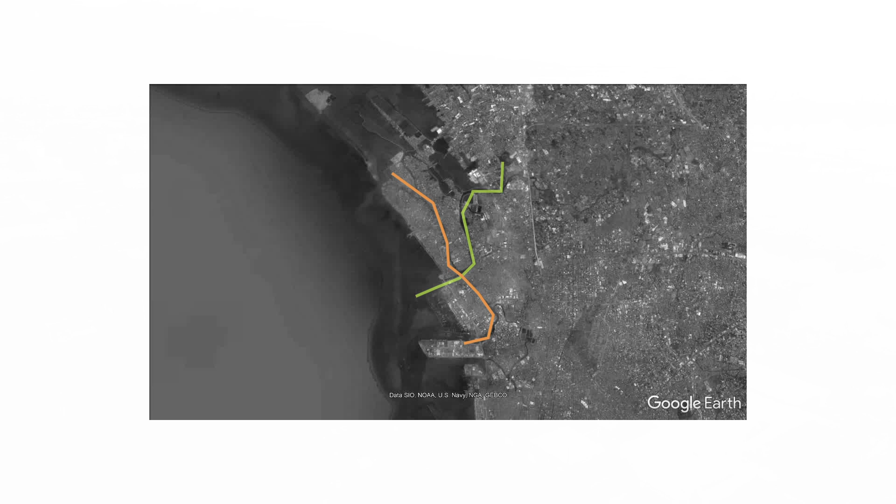Welcome to Navotas. It is along the coastline of Manila Bay, found in the northwesternmost city of Metro Manila. The reason why it's isolated from the rest is because it's divided by the Navotas River on the city's east and north front. Furthermore, the Tullahan River splits Navotas into two separate regions, creating a coastal city.

Life before Navotas was simpler, being surrounded by bodies of water made it teeming with fish, thus attracting fishermen. But of course, with the unstoppable force of urbanization, other livelihoods have popped up in the past decades. The city still remains the top supplier of the metropolis's fish needs.

You may think that now there are plenty more fishing ports in the area, but that is not the case. Factories are getting more abundant, especially in the North Bay region, and houses are multiplying in an unhealthy state. Informal settlers are spilling out of the edges of the riverside, people are residing on cemeteries, houses are cramped creating potential fire casualties. Housing may be a problem, but the nail on the coffin when traveling around Navotas is a pain.

This is Manang Jocelyn. Right now, she's delivering a bucket of chicken to somewhere in Malabon City. Her story is that she was a housewife for her two twin children and her husband.

During the pandemic, the family started using their savings, so they needed to find other alternatives to earn back the money. Luckily, her husband's work was flexible, but the pay was cut in half. Thus, Manang Jocelyn would volunteer to help out too.

Luckily, they had a family bike that was not in use. Manang Jocelyn got the idea to be a courier delivery driver. She even heard from her family members that the income was better than average.

Manang Jocelyn's family lives in Navotas but close to the border of Malabon City. This makes her situated in both cities. She would bike alongside cars and trucks, and just solely that's already mentally taxing for her.

This does not faze her anymore. She wants to be with her family. Everything points back to the people and the things they go to great lengths to do to survive in this dog-eat-dog world. This shouldn't be the case for our fellow Navoteños. Here is ReStitching Navotas.

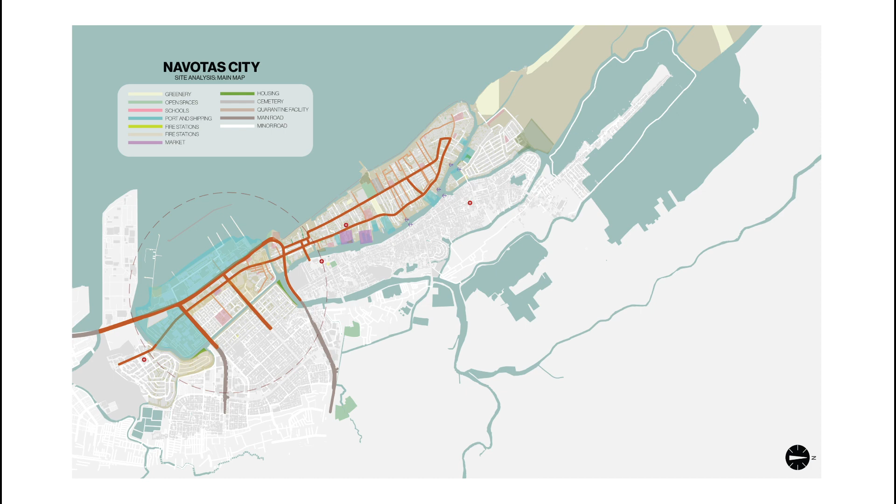We chose the North Bay Boulevard and Bangculasi area as our site. Our task was to reconfigure and improve the connections and intersections between the different types of roads found here.

The zoning map was obtained from the Navotas City Hall, set for the year 2016 to 2025. The industrial core is located at the south of the city with a few commercial zones, while the middle residential area is located at the center of the city, combining residential, commercial, and industrial uses along the river.

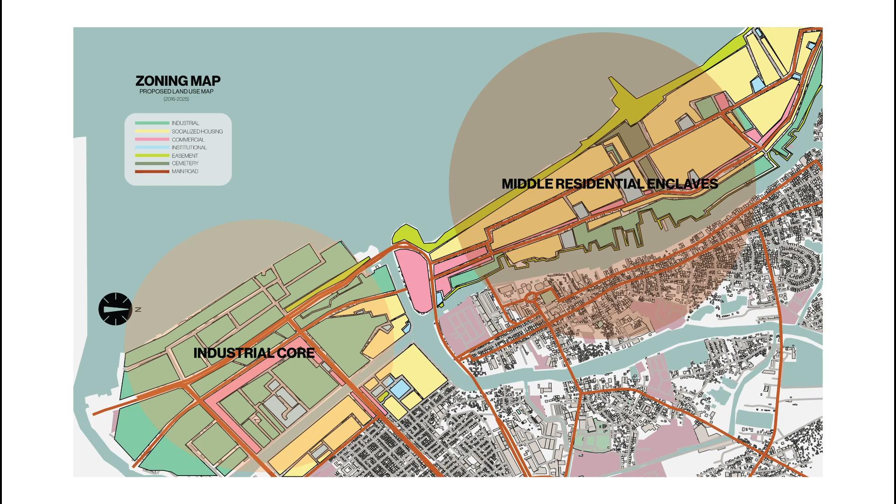The Navotas streets and alleyways are disproportionate to what they were intended to be. For example, in residential areas, sidewalks are either too narrow or barricaded with posts, vehicles, or benches. And some highways are so wide that at certain times of the day they look barren.

To help us execute and approach the project systematically, we created a profile of networks to categorize the different road types currently existing in the city. Based on our observation and research, we identified 5 types of profiles.

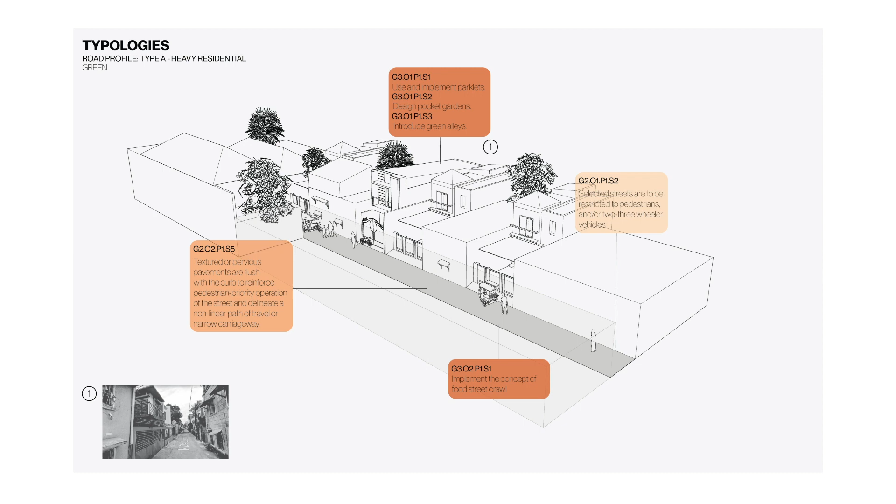Type A is heavy residential roads. Under this category, we have 4 road types labeled green, red, yellow, and blue. Green is purely residential, used for small transportation, pedestrians, and alleyways, and has no sidewalks.

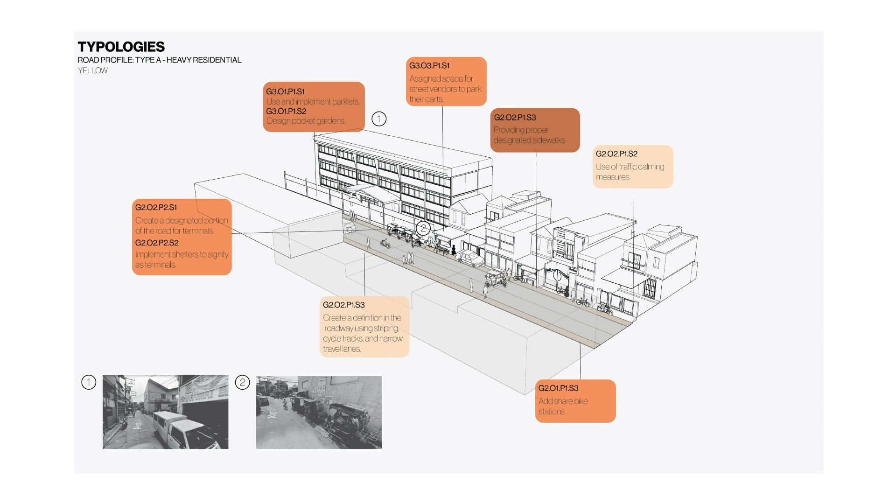Red is heavy on residential areas with local areas such as schools, churches, and commercial spaces. No industrial areas are located here; it has small transportation and pedestrians, and no sidewalks. Yellow is heavy on residential and local areas, no industrial, small transportation, pedestrians, and has sidewalks.

Blue is heavy on residential. There are barely any sidewalks here, and it is along a body of water.

Type B is heavy on residential with medium-heavy commercial use. Under this category, we only have one road type, labeled cyan. Cyan is heavy on residential with medium commercial areas, small to medium transportation, pedestrians, and has sidewalks.

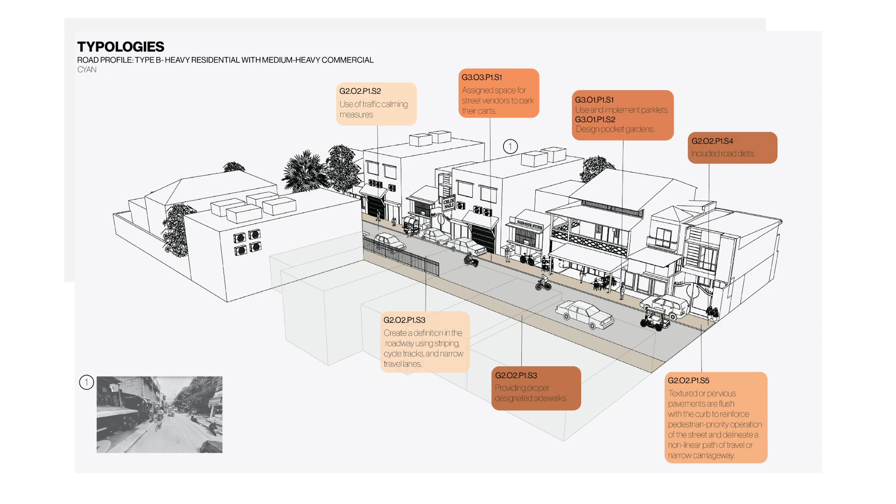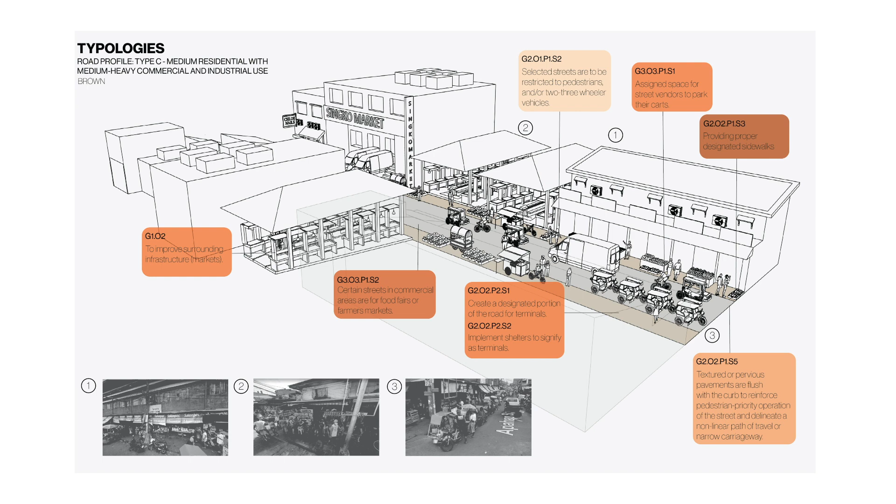Type C is medium residential with medium-heavy commercial and industrial use. Under this category, there are only 2 road types: brown and red. Brown is medium residential, medium on industrial areas, yet heavy on local areas, mostly with small to medium transportation and pedestrians seen on the street. It also has sidewalks. Red is similar to brown, although the road type is an alleyway and has no sidewalks.

Type D is heavy on industrial areas. Under this category, there are only 2 road types: magenta and purple. Magenta is light on residential, heavy on local areas, heavy on industrial areas, and accommodates heavy transportation such as wheeler trucks and fast-moving vehicles.

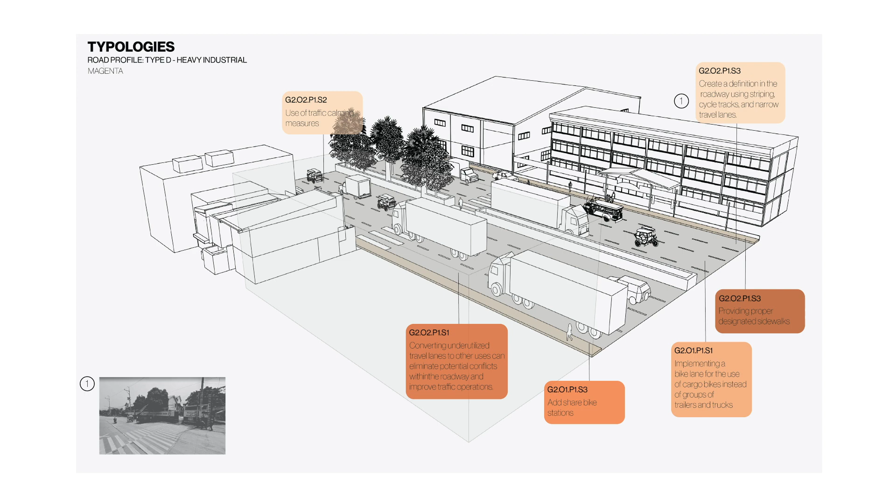And then we have magenta. Magenta is purely industrial areas, heavy on transportation, with wide highways and wide sidewalks. The last type is Type E, which are rivers. Rivers in Navotas are Tangos River, Tullahan River, and Navotas River.

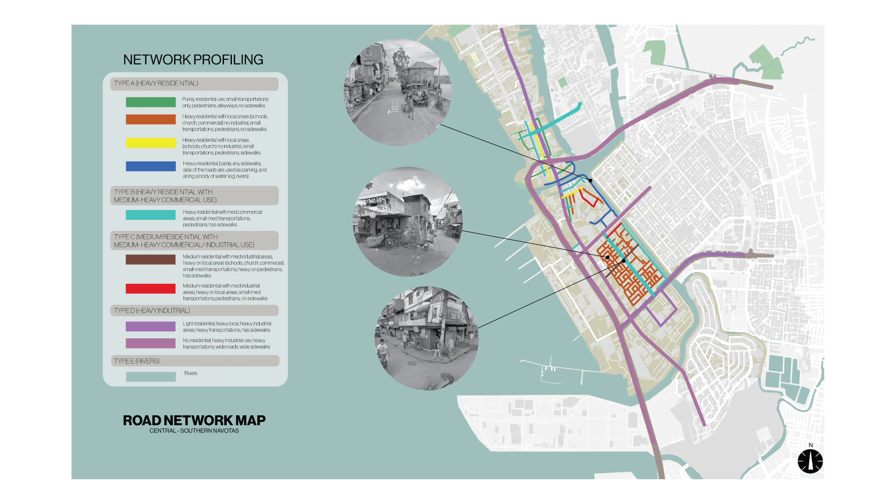Here is a map of how they interact and connect with each other. It can be observed that the magenta, or C4 road, cuts through the city coming from other industrial areas. With Navotas situated around bodies of water, it is inevitable to experience flooding. Narrower roads experience stronger floods, and that is exactly the situation with blue roads.

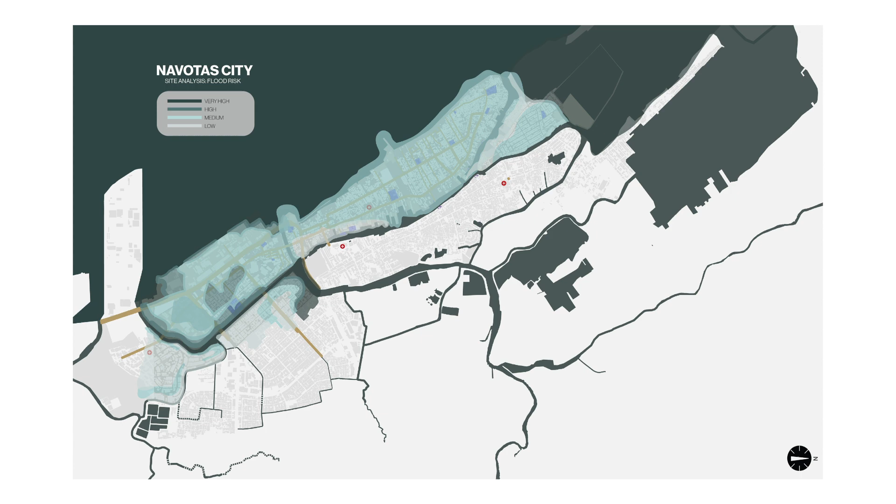It was determined that by 2030, the water around Navotas would rise nearly 11 centimeters, which will consume 28 kilometers from the coastal area. Our conceptual framework, entitled 'Achieving a Human-Centric Sustainable City Port,' divides the areas we wanted to improve into stages.

These stages are arranged based on what is more valued and needed by the people. They are also arranged by what will be prioritized in the project, with some added as supporting layers. Infrastructure and mobility will be the prioritized aspect, heavily focused on rehabilitating terminals and flood management systems, while commercial and welfare will be supporting layers for the first two.

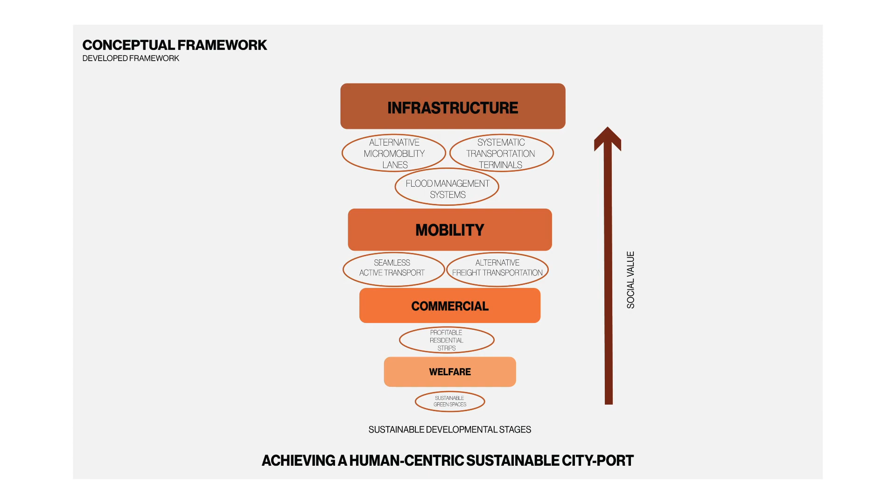We have 3 goals in our project. One is to aid the fishermen in the city. Second is to alleviate the dynamics of the residential-industrial areas. And lastly, to improve the welfare and city living for Navoteños.

Having cited our 3 goals, these are the objectives that could push our agenda further. Number 1, improve not just the roads but the surrounding utilities or infrastructures, specifically terminals, ports, and markets. Number 2, redesign common road networks to be balanced in terms of residential and industrial use. Number 3, make pedestrian commuting comfortable and safer.

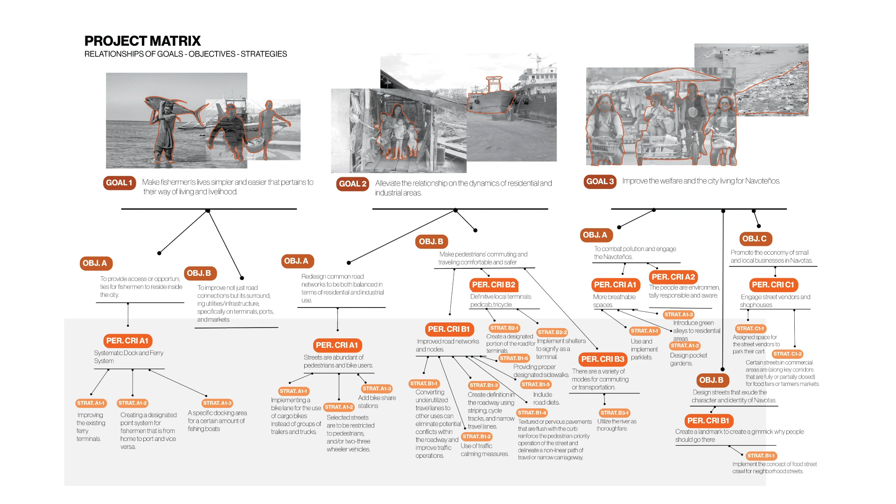Number 4, alleviate the flooding problem of the city. Number 5, combat pollution. Number 6, design streets that exude the character and identity of Navotas. And lastly, promote the economy of small and local businesses.

After thorough research and analyzing the situation of Navotas, we want to make sure the design is sustainable and not just a band-aid solution. Starting with the smallest type, which is type A, just a refresher, this is what we identified as purely residential area.

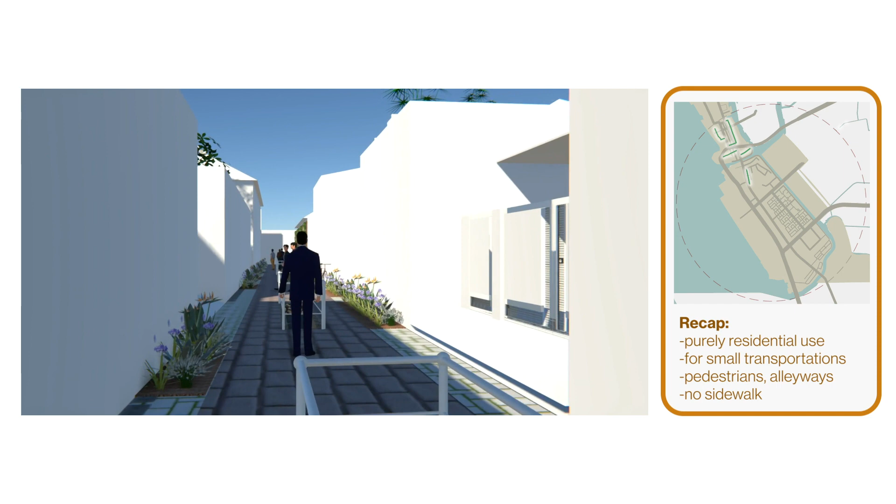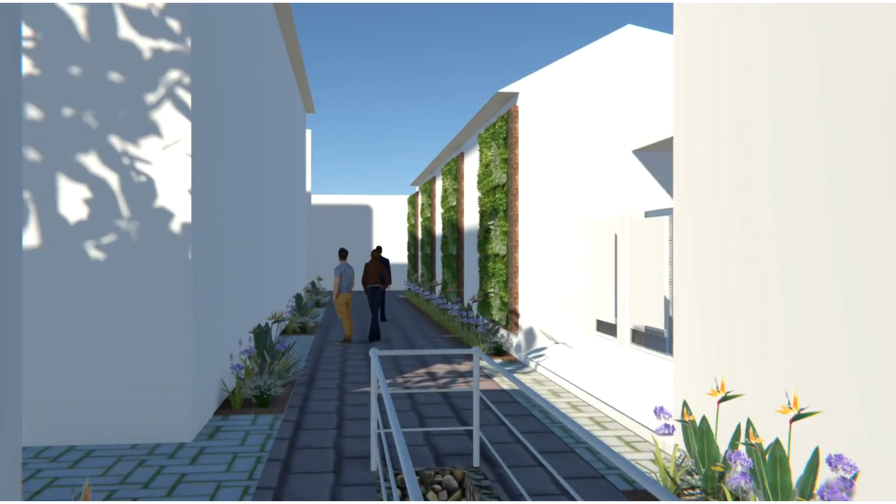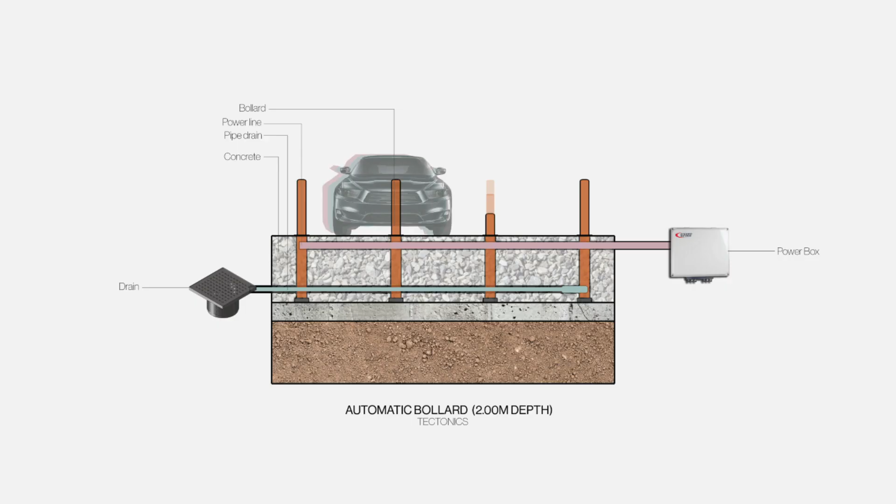However, it is still a residential area, so we cannot stop vehicle owners from entering these roads to access their home. We introduce automatic bollards to temporarily blockade the ingress and egress of the road unless the homeowner has a specific remote to turn it down and allow them to get in.

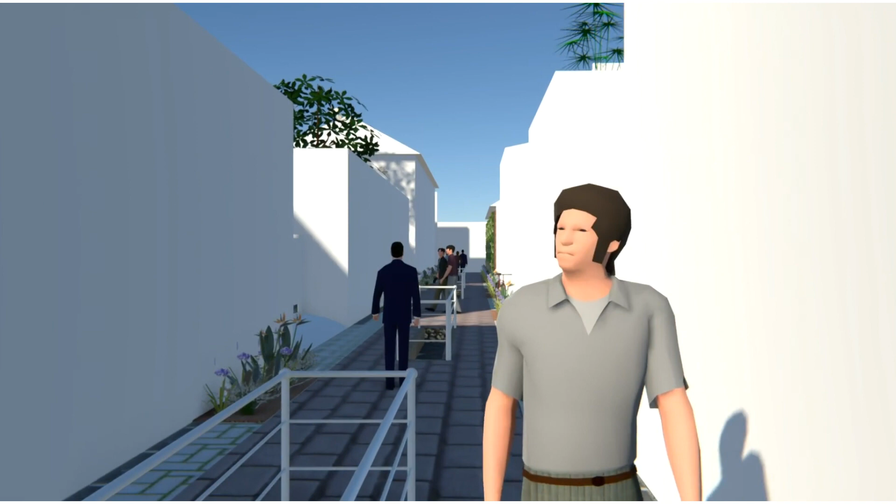Complementing the pedestrian streets is the application of textured or pervious pavements to further reinforce the pedestrian priority operation of the street, at the same time reducing flood levels by absorbing water on the surface. With the pervious pavement, we have green alleys to further push our flood management system.

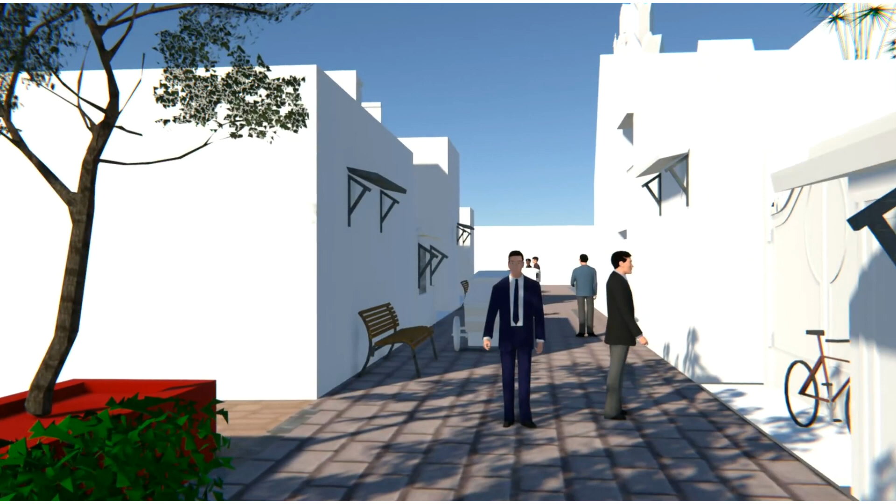Following green is orange. They have similar implementation of design, but there are some that still differ. Since orange is a mix of residential and local areas such as schools and churches, we introduced the concept of food street crawls. Navoteños can finally immerse themselves in the exquisite food that their city has to offer. At the same time, workers and drivers alike have adequate shelter while they are eating, and it increases sales and pushes local business and tourism.

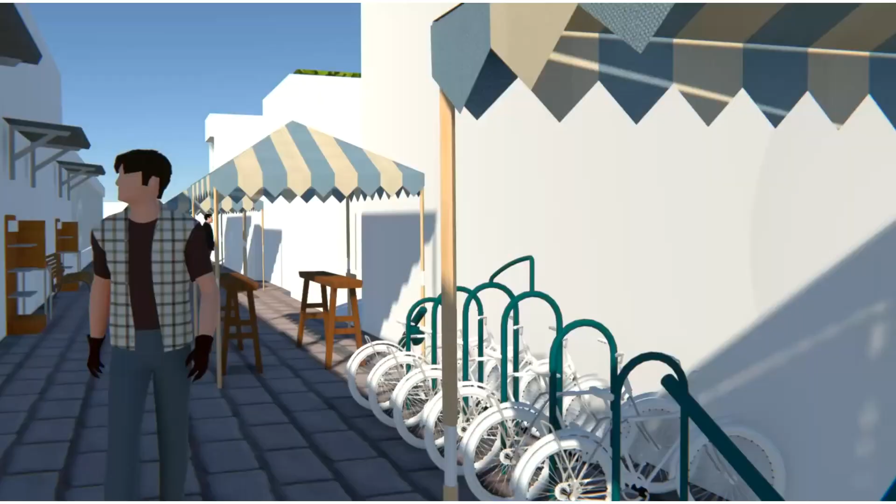It may look narrow, but we designed them in such a way that emergency vehicles are still able to drive safely through. And during Sundays, we can close down the road from cars and reuse the parking lot for additional space for food stalls.

Yellow roads are noticeably different from the purple types and the cyan and green. Yellow have more schools, churches, and commercial spaces. This makes the roads wider but not as wide as a highway.

With that said, their sidewalks lack width, therefore we had to merge the road and the sidewalk, creating a one-way street. This regulates the vehicle flow, freeing even more space for people and bicycles. To ensure speeds of cars are at the bare minimum, we added speed tables and chicanes.

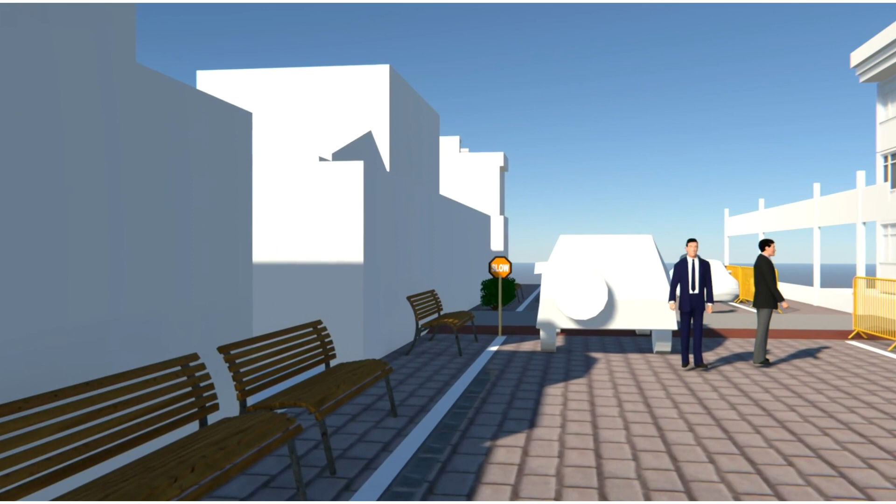There's a temporary tricycle terminal directly outside the school for the students who need a convenient access point to commute. For the flood management system, to name a few, these were implemented: rainwater gardens, infiltration garden, sloped camber road, water plaza, and green roofs.

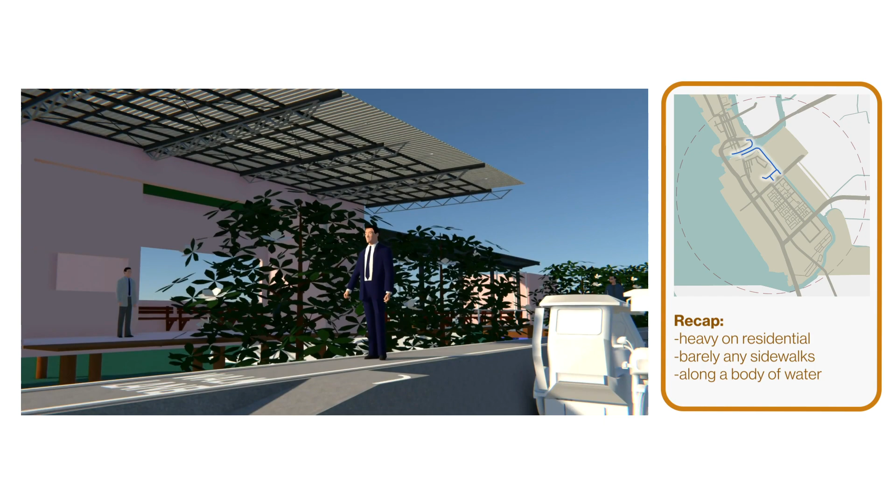We have discussed neighborhood streets that got flooded from rain, but what about roads that are directly affected by the river? These are what we call the blue. Sidewalks are too narrow, so we made cars and pedestrians share the same road. Because of that, to ensure the people's safety, we implemented traffic calming measures.

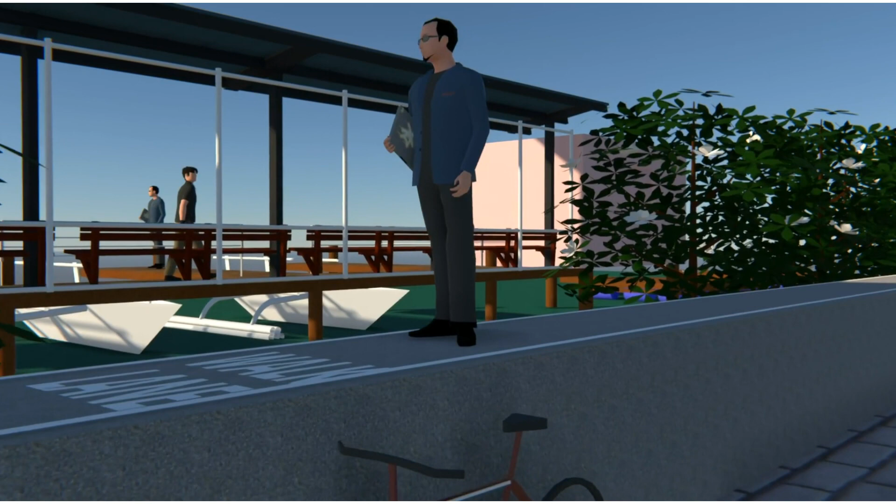We designed all of our ferry terminals to be open air and welcoming. The colorway was intended to be bright and stand out so commuters can easily identify them. It houses at most 15 people, since it's not a popular transportation route.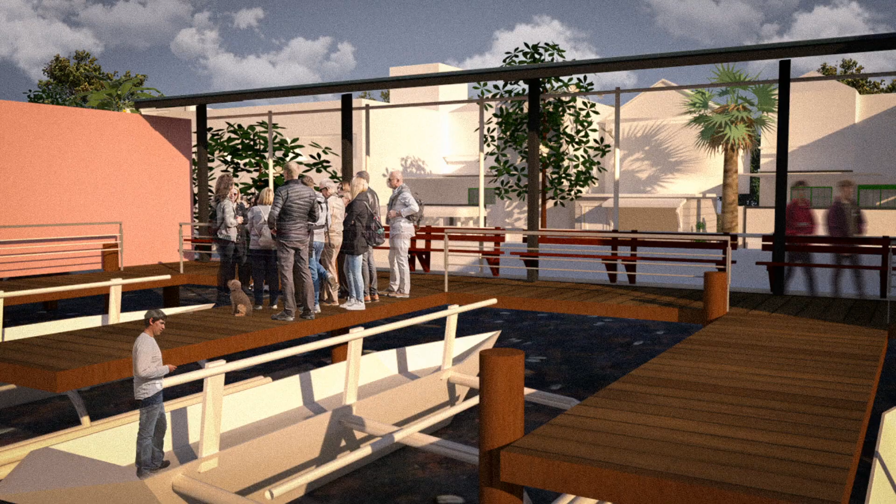Besides the passengers, it can also hold a maximum of 3 ferry boats and 4 fishing boats with proper boarding and docking areas. Right in front of the terminal is what we call a levee. They are made to prevent the overflow of a river. We also included a path for those who want to walk directly alongside the river.

The design for the cyan road type was to dedicate a designated two-way bike lane, since in the project we highly encouraged the implementation of cargo bikes to reduce the heavy transportation on neighborhood roads. Cyan is considered a major road since it is the artery to the alleyways.

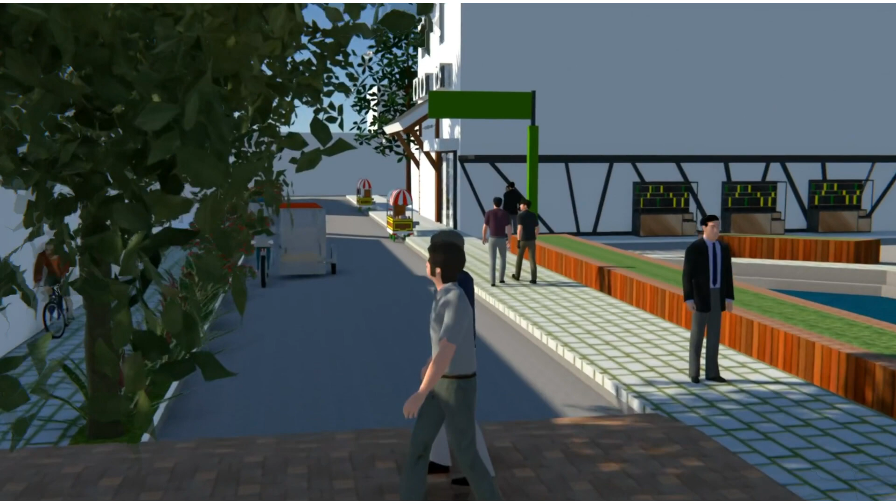Moreover, we wanted to make this road safer by implementing speed tables and vegetation barriers because there will be more pedestrians to accommodate for. As for our proposed approach for flooding strategies, we considered 3 levels.

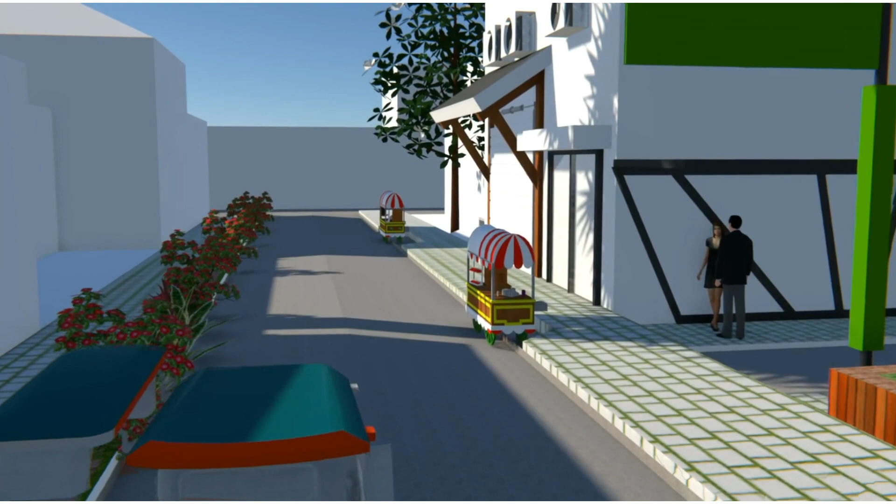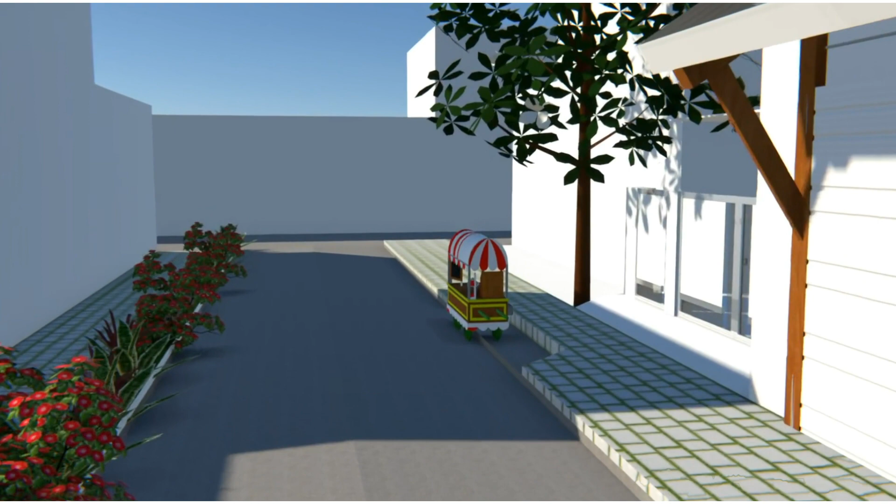For the medium-level flood risk, we opted for rainwater gardens and infiltration systems. For the high-level flood risk, there is the additional use of green roofs and water plaza. Lastly, the very high flood risk includes the use of slope camber roads, and an increased level for the sidewalks will be implemented.

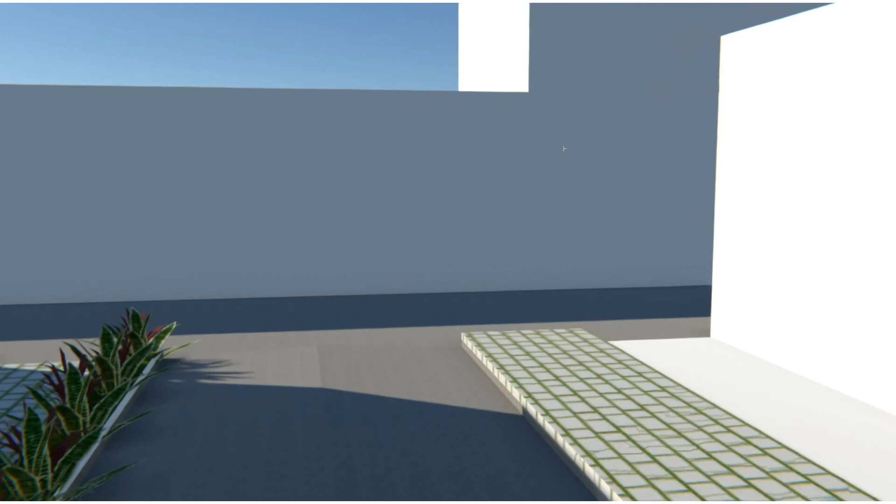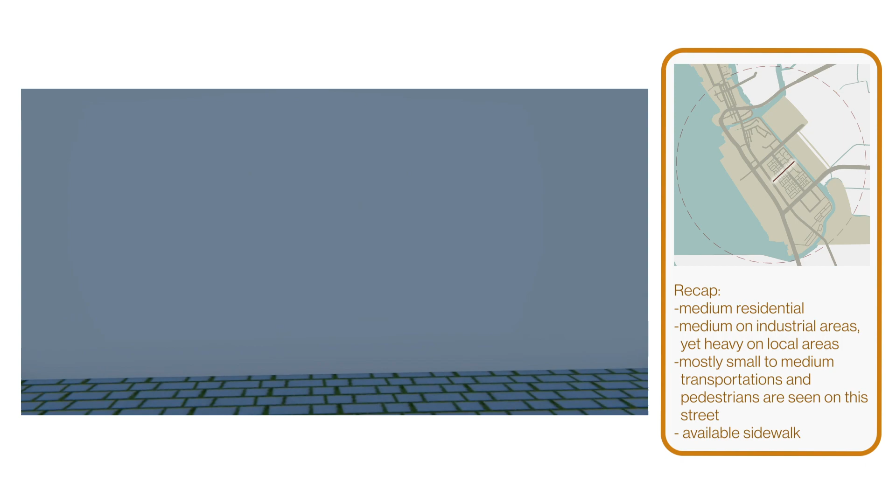The strategies that we applied for the brown road type include the following: providing proper sidewalks, dedicating the street for pedestrians, and improving its surrounding infrastructures, which are the market and the tricycle terminal. We also decided to make this street a one-way street since we dedicated one side of the road to be a walking street, since originally, the other side of the road was blocked by the terminal and the pedestrians.

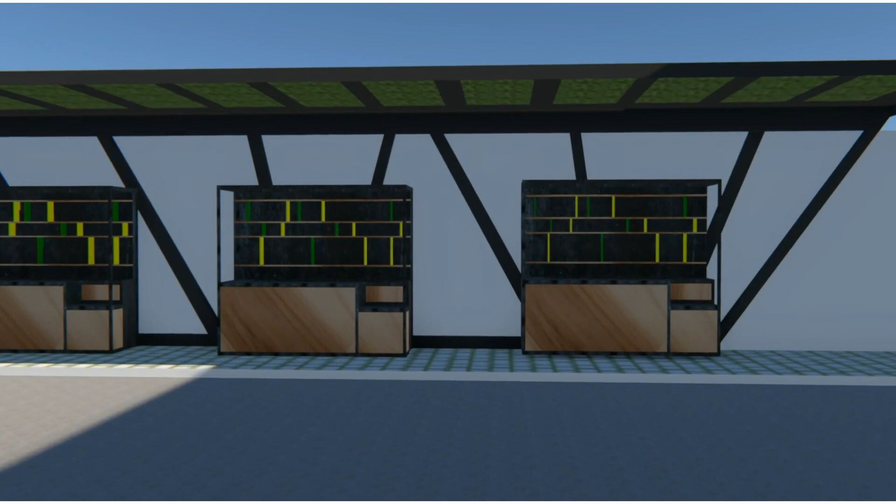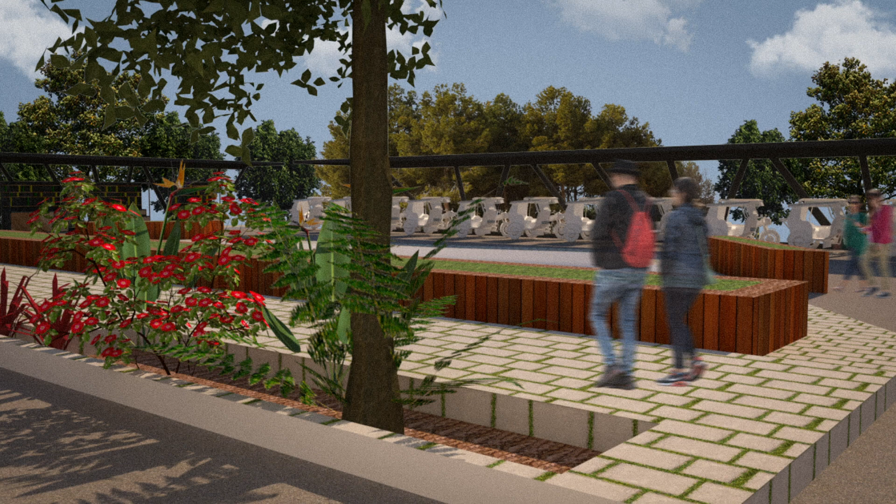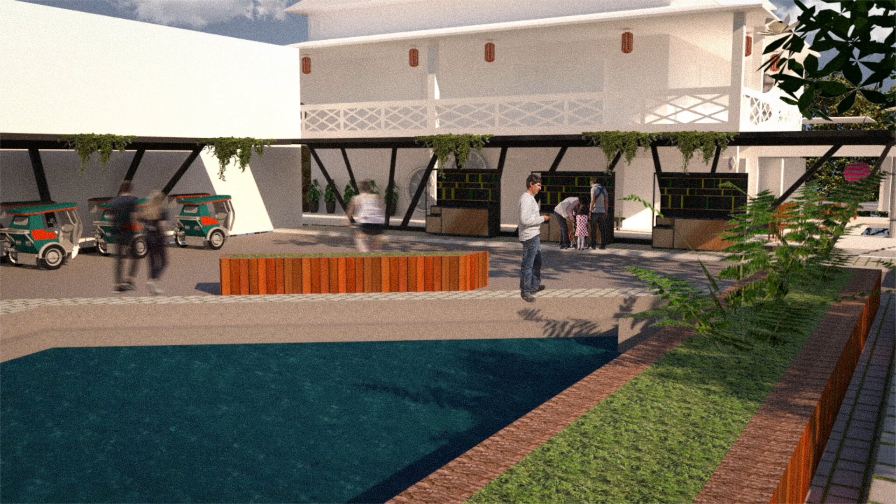As for our approach for alleviating the flooding, we propose two types of iterations in combating this at different levels. For the high-level flood risk, we propose the use of green roofs, climate roads, and infiltration. Meanwhile, the strategies for the very high-level flood risk are the additional implementation of water plazas, rainwater gardens, and using a slope camber on the road.

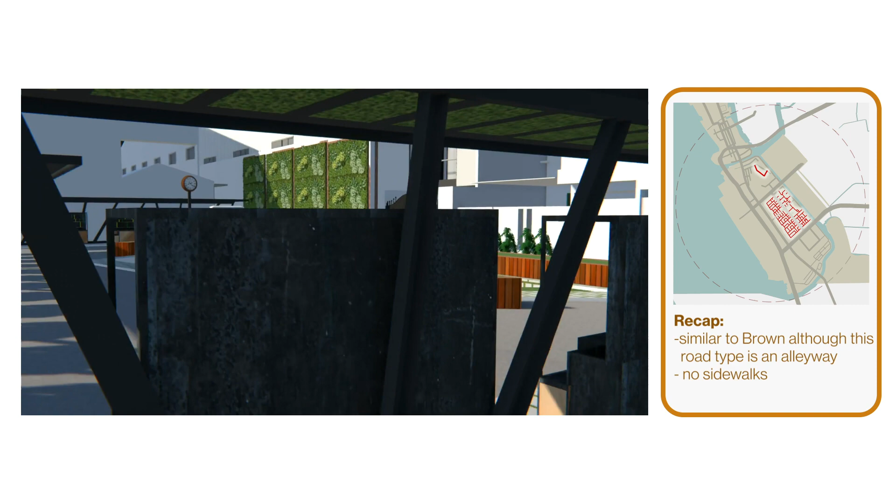Reyes Street is a very narrow alleyway that caters to residential and local areas. Given the limited space, we decided to remove the existing terminal on the road and designate a terminal instead. Additionally, a design iteration of a food street cart is also considered for this road type because we think that this could be one way to divert pedestrian traffic on the street.

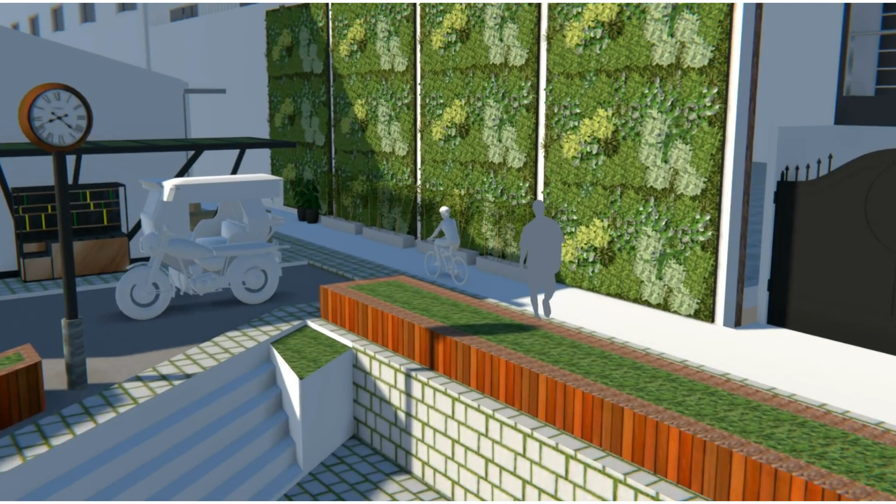As for our proposed flooding strategies, we consider 3 levels that include a variety of strategies, namely the use of rainwater gardens, infiltration, slope camber road, water plaza, green roofs, and green walls.

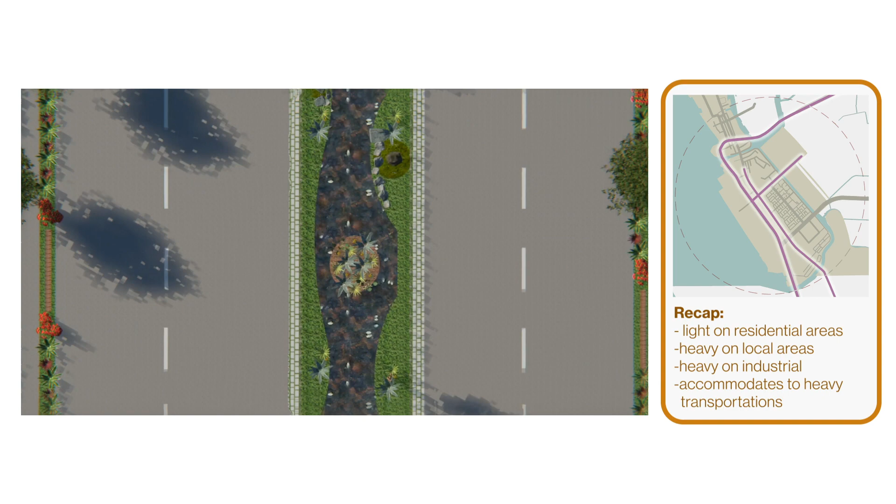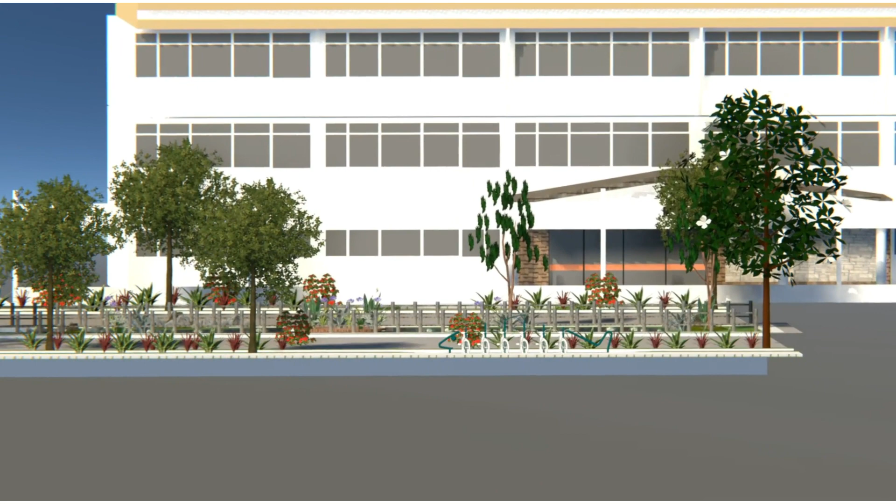Magenta is a highway road that accommodates residential, local, and industrial areas in Navotas. Currently, R10 Radial Road is an 8-lane road that only serves its purpose as a means for heavy transportation without regard for pedestrians. To make the road dynamic to residential and local areas, we use traffic calming measures such as road diets to lessen the lanes for vehicles and speed tables to reduce speeding.

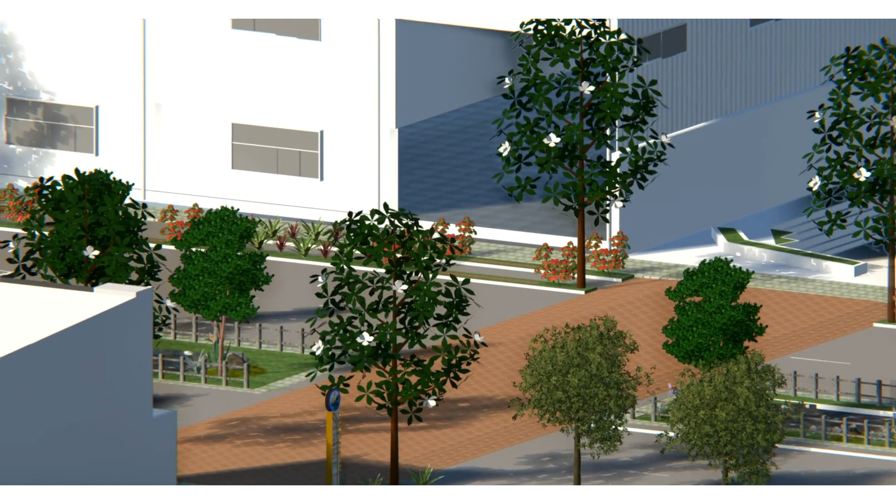Moreover, we also added bike lanes that are protected by vegetation barriers. And to encourage Navoteños to use bicycles, bike share stations and public restrooms are also designed.

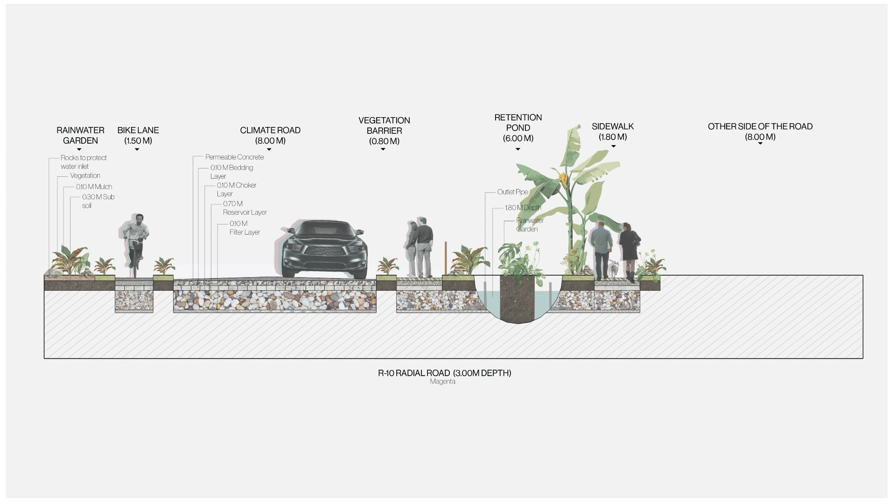As for our proposed flooding strategies, we considered 3 levels that include a variety of strategies, namely the use of rainwater gardens, infiltration, retention pond that comes with protected fences or barriers, slope camber road, water plaza, and green roofs.

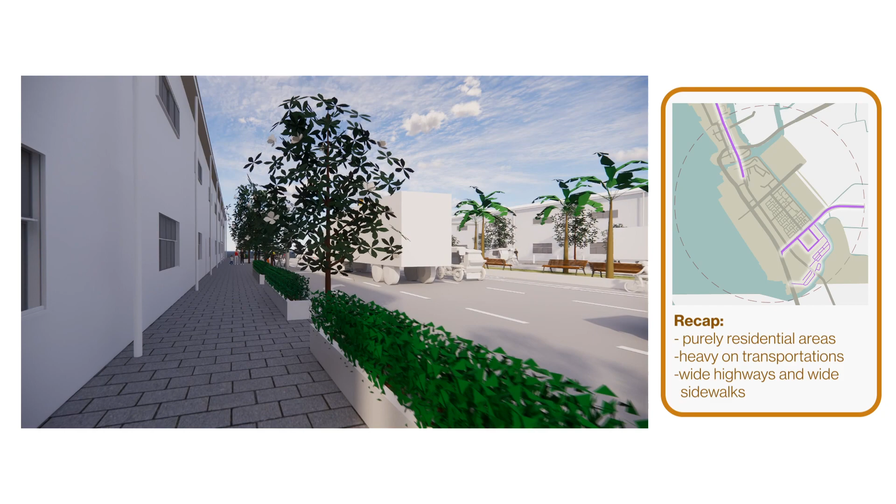Here we have the purple. We removed the lane from each side to accommodate bike lanes and a street island that would be repurposed to a vertical garden or a retention pond.

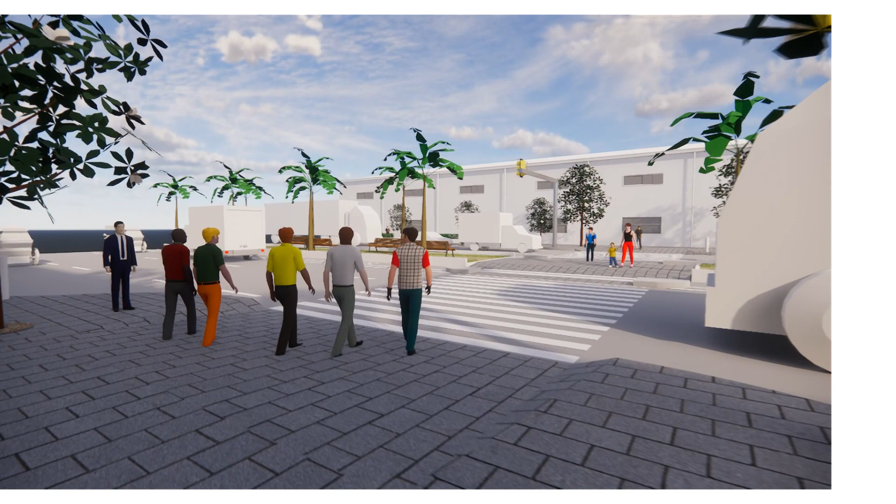For pedestrians to feel safer when crossing the road, we included pedestrian refuge islands and shortened the distance of the crossing itself. They also are used as chicanes to slow down incoming traffic. Trees serve as a barrier between the sidewalk and the road.

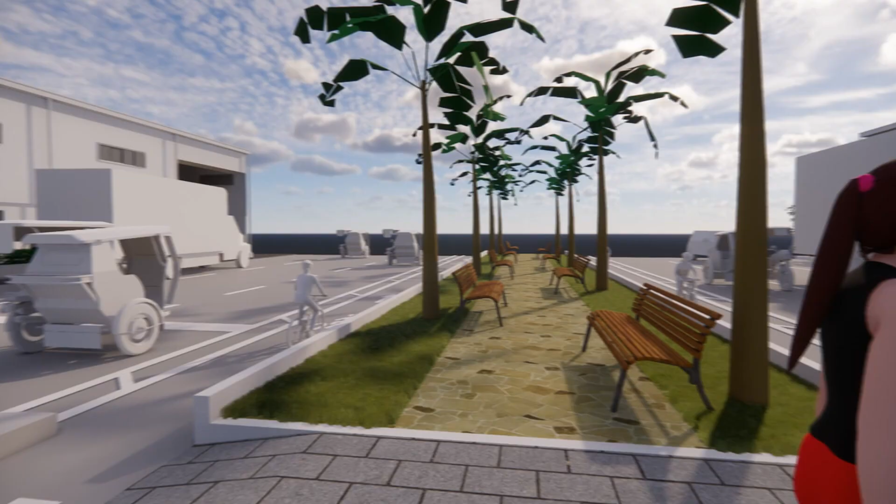During our whole research on Navotas, it may seem like it got the short end of the stick of industrialization. But let me tell you this: the local Navoteños have the tenacity and perseverance to overcome their disparaging situation. They choose to fend off what's left of their past and their culture.

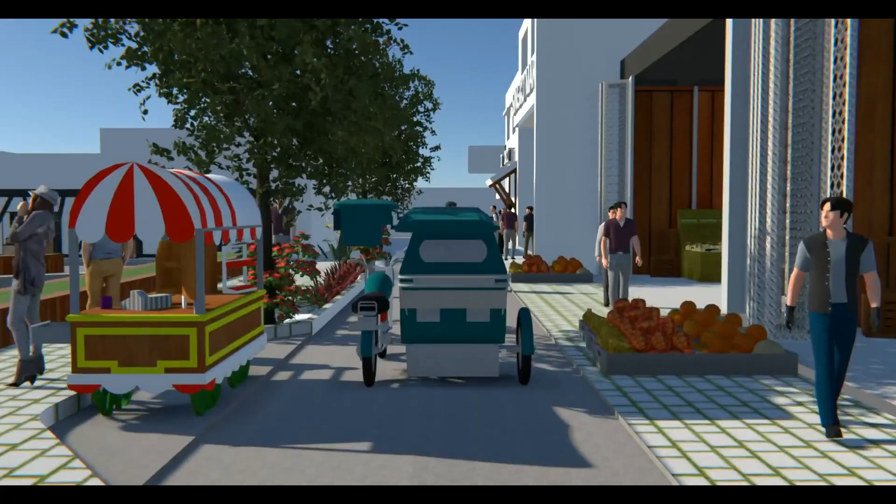With our project implemented, bonds will grow and strengthen. Road networks will solidify the community and restore the paradise it was known to be, but not just for the wealthy, but to be enjoyed by all.

Before we end the video, we leave you with this: The Philippine Islands, written by Emma Blair, Navotas 1900s.

All that I have above related having taken place, it was decided to make peace with the nearest villages, some of whom had come to beg it from the governor, and others would not. Among those who would not come was a village called Butas, situated on an inlet on the other side of the river, flowing past Manila, and about a league and a half away. This village, uniting with the others nearby, sent word that they did not wish peace or friendship with the governor, and had the boldness to come as far as the village of Alcandora, quite close to Manila. Hence, they sent defiance to the governor and the captains.